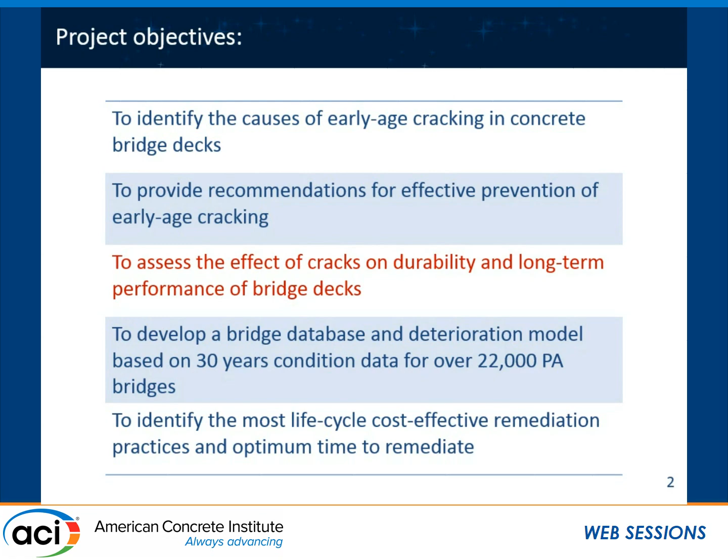Other than that, the work involved developing a bridge database and deterioration model based on 30 years of condition data for a large inventory of Pennsylvania bridges, and finally identifying the most cost-effective remediation practices based on the life cycle cost of the structure, to determine the best way to repair and the best time to repair.

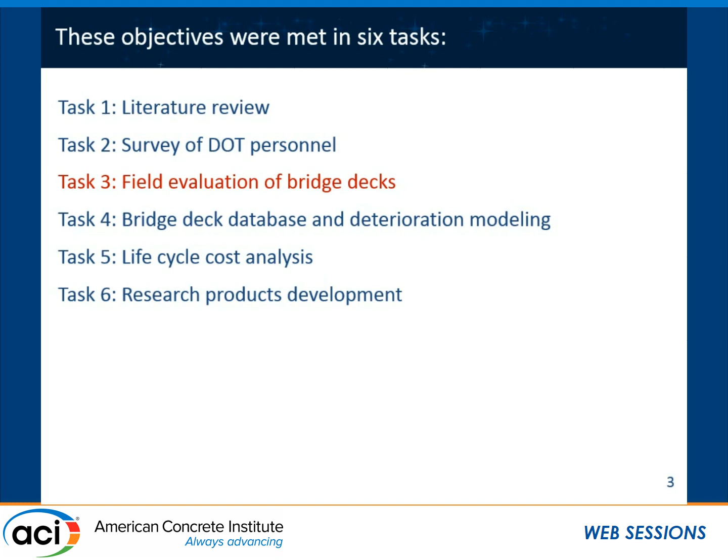These objectives were accomplished in 6 tasks: literature review, survey of DOT personnel, field evaluation of bridge decks (primarily what I'll talk about, item 3), the bridge deck database and deterioration modeling, life cycle cost analysis, and finally development and dissemination of the research products.

The work on early age cracking of concrete is not new research. It's been going on for 30 or so years, and there's a lot of good quality research data that supports some of the causes of early age cracking.

In this slide and the next, I'll summarize in a condensed version what we found in the literature. First, it's been confirmed repeatedly that the primary cause of early age cracking is restrained volume change, as opposed to things like traffic loads and other mechanical loads.

So essentially, as our previous speaker also referred to, we have a concrete deck that is cast in place over a girder, and the concrete naturally wants to shrink or contract after it's been cast. This could be thermal contraction after the concrete temperature peaks around time of setting and then cools down to ambient, and it could also be due to drying shrinkage or autogenous shrinkage.

However, the girder doesn't want to shrink, and as a result we get this restraint effect, tensile stress, and cracking in the concrete deck.

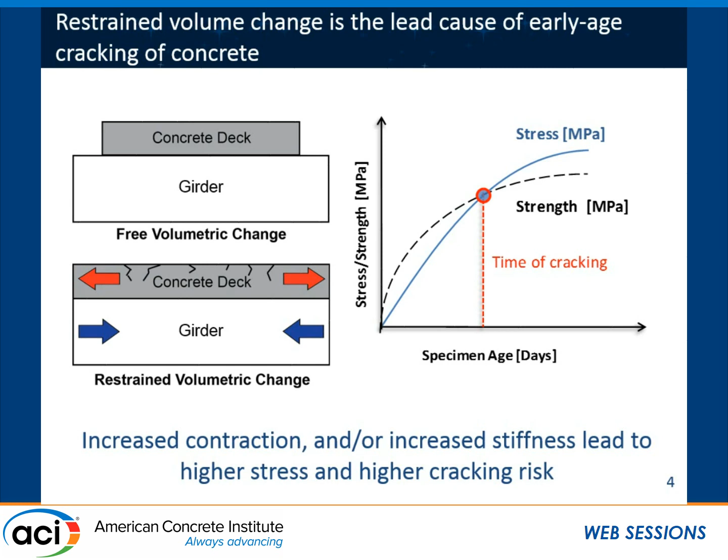Increased contraction could occur, for example, when concrete has a higher paste content, which would shrink more, or a higher cement content and higher heat of hydration, so thermal contraction would be more. Increased contraction as well as increased stiffness, or elastic modulus, or compliance, impact the amount of stress that generates in concrete. So concretes that are stiffer, that are higher strength, somewhat counterintuitively, would be more prone to cracking.

Okay, so some of the key information gained from the literature review. One is that to minimize early age cracking, we have to limit the total amount of cementitious materials or paste content, and 28-day strength, which has a large impact on the stiffness of concrete, as well as slump.

There has been good work, including very good work at the University of Kansas, that shows higher slump concrete could be more prone to things like settlement cracking and so on, or excessive slump in concrete.

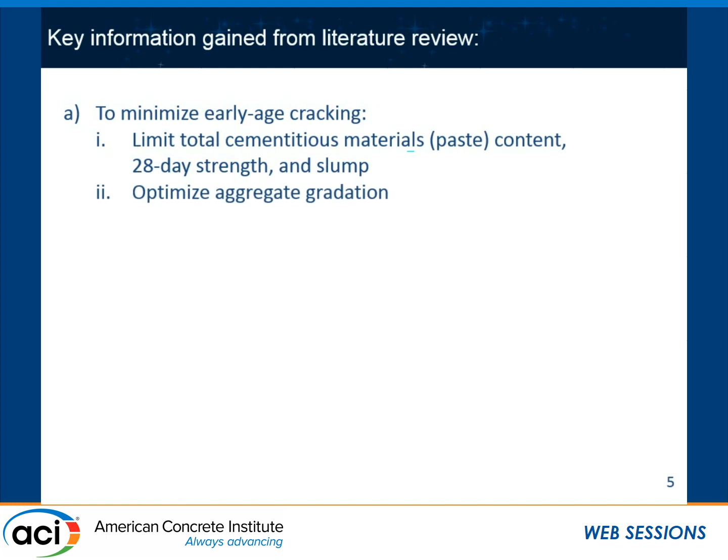Optimizing aggregate gradation would help with reducing the paste content and therefore reducing the cracking. Use of supplementary cementitious materials primarily through reducing the heat of hydration and thermal contraction, and also it has another advantage of increasing the resistivity of concrete.

So once the concrete cracks and once you get the salts at the level of rebar, the resistivity of concrete would help slow down your speed of corrosion or rate of corrosion.

Enforce proper moist curing, so that helps reduce the overall shrinkage and also delays when the shrinkage happens. Limiting rebar size and spacing again helps in controlling the cracks. And there was some mention that concrete girders may be preferred over steel girders, and I'll talk about that more in our data.

Also, the literature suggests that cracking shortens the corrosion initiation. It makes sense - you get cracks, the salts can get direct access to the rebar. But it's interesting that chloride buildup off the crack seemed to be more important than on the crack.

The reason for this has been suggested that right at the crack you can get some corrosion and get some corrosion products which effectively seal the crack, or at least seal the tip of the crack right where it intersects the rebar. It seems like until the other parts of the rebar start active corrosion, you don't get a lot of corrosion happening.

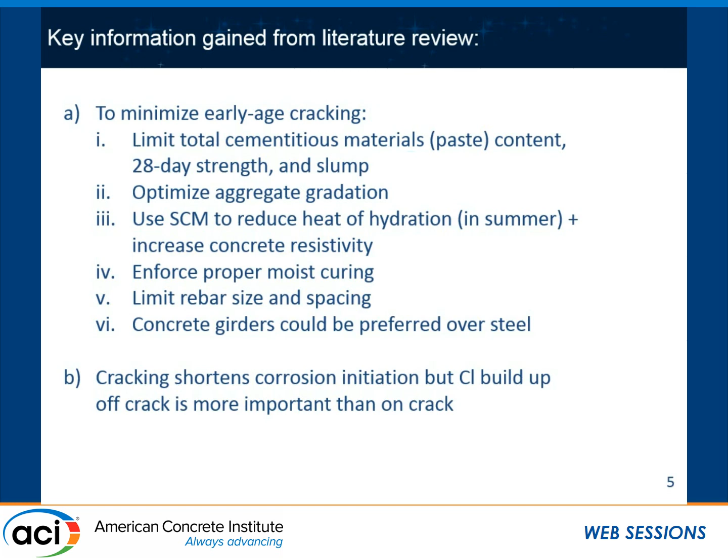To reduce the risk of corrosion, use a minimum of 2 inches of cover and supplementary cementitious material. Any remediation action has to take place before active corrosion starts. So once we are past the corrosion initiation period, repairing is not going to help us much, because the steel underneath is going to keep corroding even if you repair the surface.

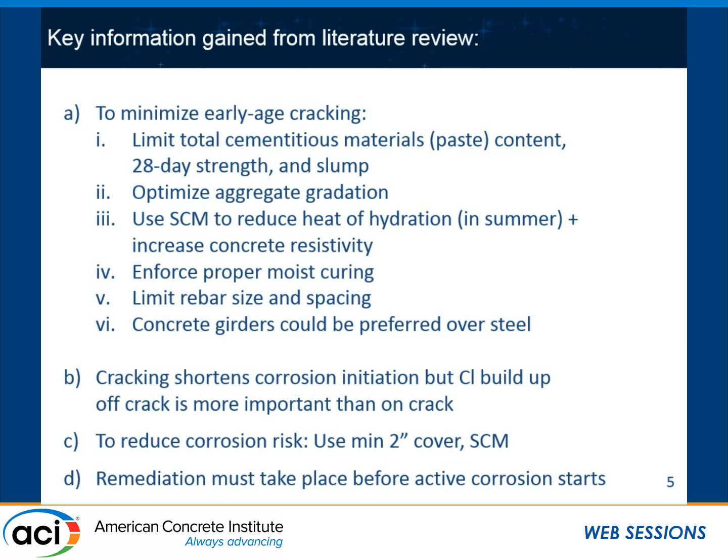So most of these findings are based on lab work, and what we did is essentially look at the field data and the actual bridges that PennDOT owned. We looked at a little over 200 bridges, including 163 new bridges as well as 40 older bridges, and primarily we looked at crack inspections.

We mapped the cracks, measured the length of the crack per unit surface area of the deck, both at the time of construction as well as 1 year after construction.

For the older decks, we did crack inspections. We also did coring and measured the chlorides.

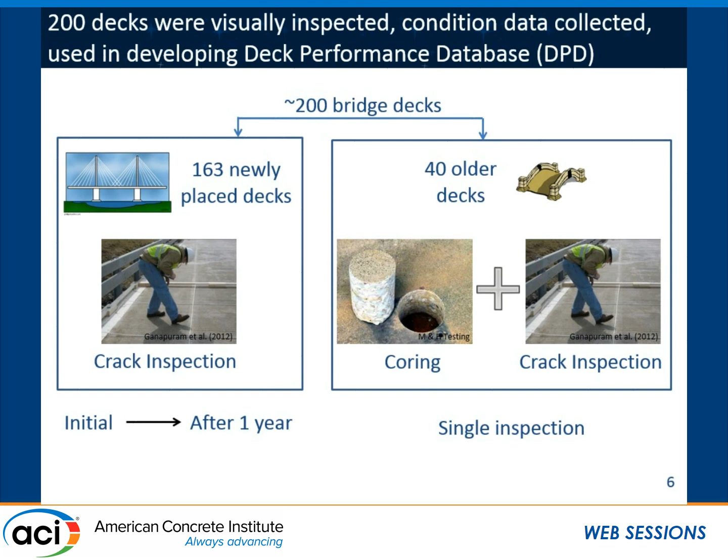So the crack inspection was used to get something called crack density, which is the length of the crack per unit area of the deck. The unit would be, for example, yard per square yard of concrete.

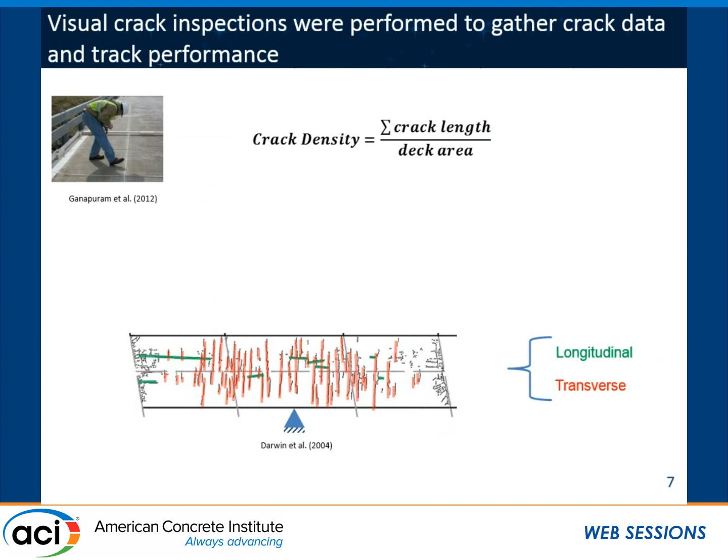We looked at both longitudinal and transverse cracks, and we looked at positive and negative moment areas of the deck.

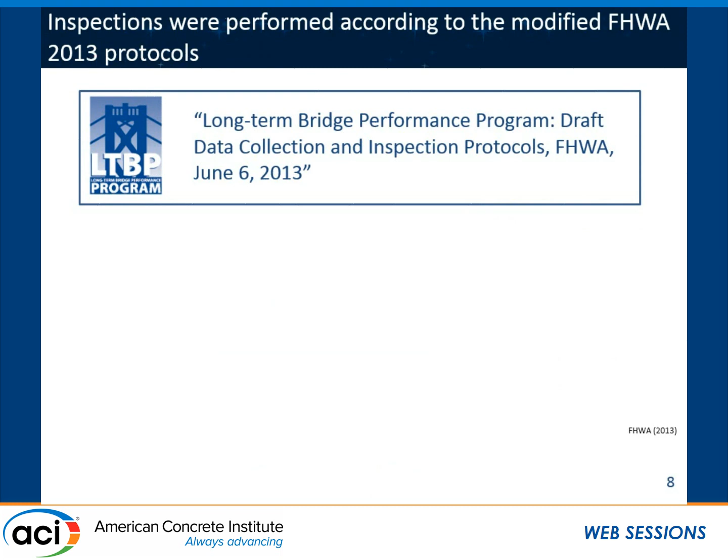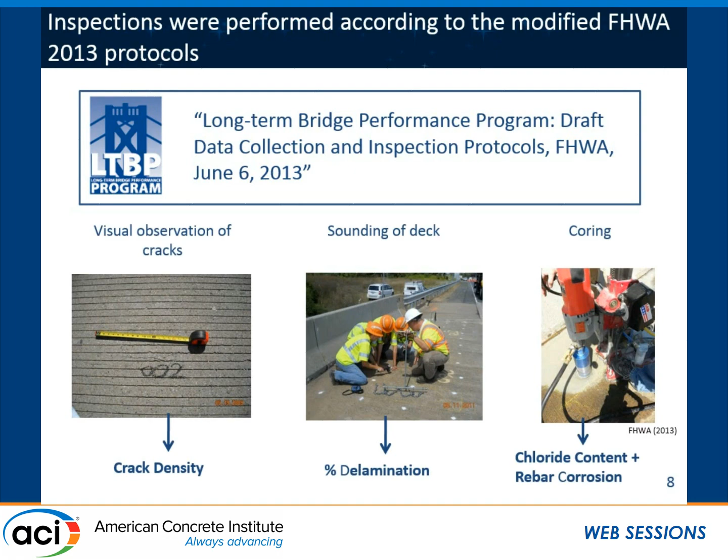This project happened in the span of 2013 to 15. We followed the Federal Highway Administration protocols that were most up to date at the time, which include measuring the crack density, measuring the delamination by sounding the deck, coring, measuring the chloride content, and looking at the rebar status.

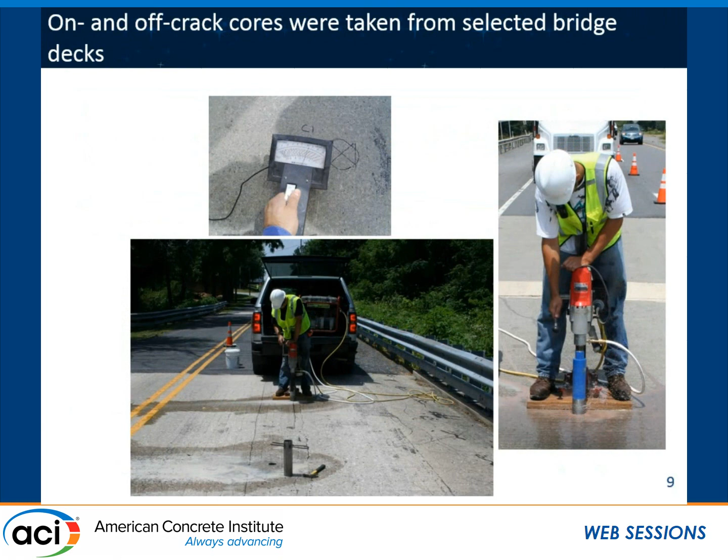The coring happened both on crack and off crack, so we had a rebar locator that we could use to determine where the rebar is. We again took samples from the concrete at the level of rebar, determined the chloride content, and looked at the condition of the rebar.

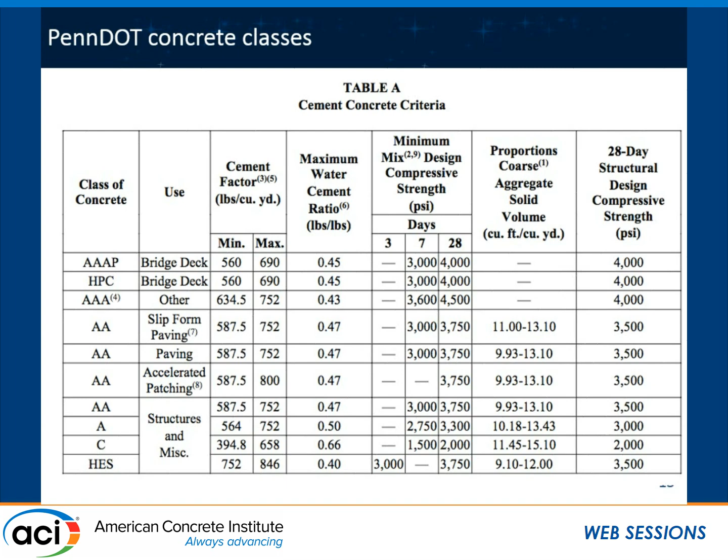We're looking at only these three rows: AAAP, HPC, and AAA. You can see over here that the structural design strength of all three of them is 4,000 psi, so the amount of strength we need from a structural engineering standpoint is the same. However, the PennDOT specification requires AAA to be over-designed by at least 500 psi, so this is designed at 4,500, and the maximum water-to-cement ratio is 0.43 as opposed to the other ones that are 0.45. There's also some information about the minimum and maximum cement content in the PennDOT specification.

If we look at this, this is the same graph that we saw before. This one shows the amount of total cementitious material content, the total Portland cement content, and the total SCM content. The light orange and white add up to the dark orange. We can see the AAA that cracked the most had the highest amount of total cementitious material, and between the other two, the HPC, which cracked the least, had higher SCM replacement in comparison with the AAAP.

So it looks like lowering the strength helps. It looks like capping the maximum cementitious materials is good, and also replacing, within reason, Portland cement with SCM is helping - and that's primarily through reducing the heat of hydration and reducing thermal contraction of concrete.

We also looked at, out of the 163 decks, about a third of them were placed on steel girders and the other ones on concrete girders. It looked like we found a significant difference between the cracking density of the two. We did not explore the cause of this much further - it could be due to the stiffness of steel, or maybe temperature development in concrete and how much of this is sunk into steel, and so on. But it looks like, just based on field data, that pre-stressed concrete girders are doing better.

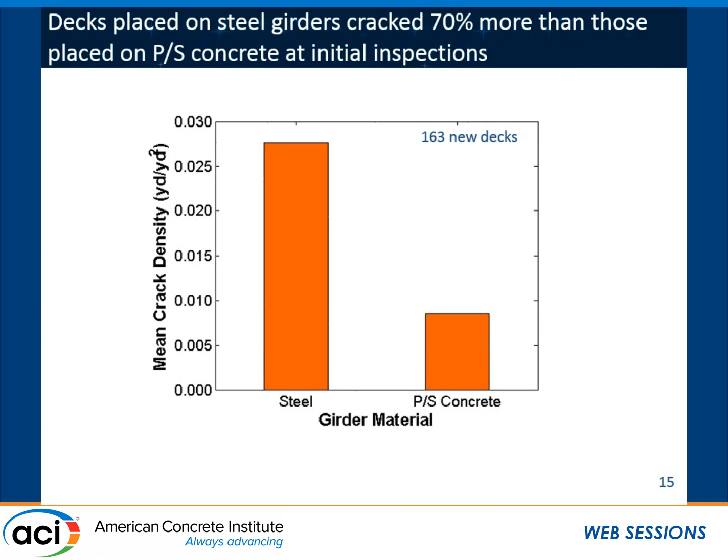We also looked at two methods of construction. One of them is called half-width construction, which means you have a deck and you close down half of it - let's say repairing half of the deck longitudinally and directing traffic on the other half. The full-width construction is that essentially you have a detour and move all the traffic off the deck, and do the repair or reconstruction. It looked like the half-width construction resulted in a lot more cracking.

Okay, now let's move on quickly to the chloride data. This is kind of raw data on the chloride content from the 40 older decks. Obviously, for the new decks, the chloride contents were none or very small. So here we have, as a function of age, the chloride content, and we can see both the on-crack and off-crack data points. We use this data to determine the effective diffusion coefficient of chlorides into the concrete, which is this graph. And we have the data, again, both off and on crack, so we can, for example, see this at the same age, most likely the same bridge - let's say over here, 2 off-crack and 1 on-crack, and so on.

And for these, we also figured out a ratio of the on-crack to off-crack, and we see that for most decks, that ratio is somewhere between 1 to 4. So it looks like the cracking can accelerate the diffusion by up to a factor of 4.

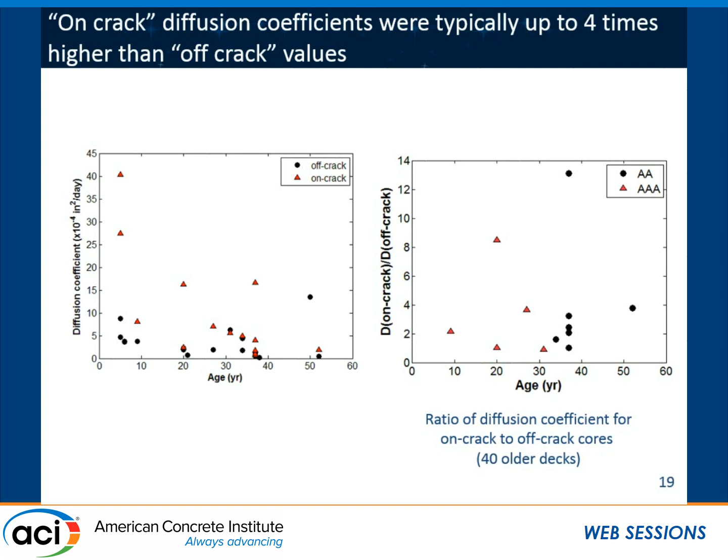We also looked at the black rebar and epoxy-coated, again, in cracked decks. The black rebar - all of the red dots show that the rebar that has started to corrode. The blue shows no corrosion. It looks like at the chloride content of about 0.03% of the concrete weight, the black rebar started to corrode. And for the epoxy-coated rebar, it looked like that corrosion threshold was increased by a factor of about 7.

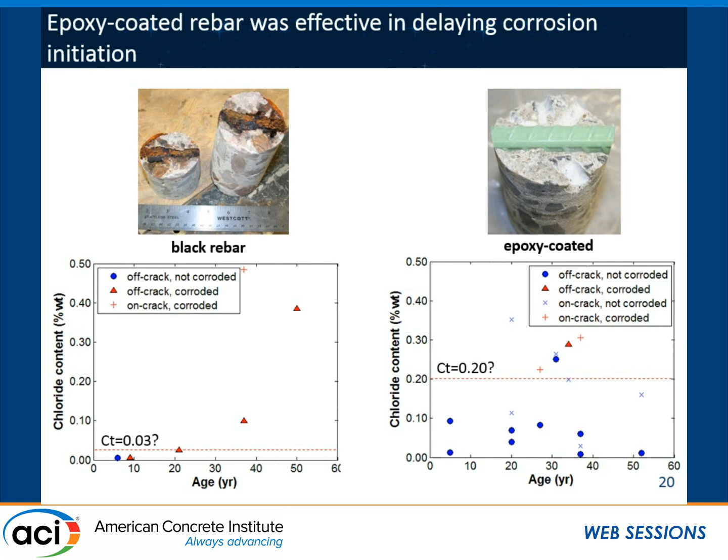So they didn't corrode until about 0.2%, both in the case of cores that were on cracks or cores that were off cracks. So it looks like the epoxy coating is helping, even in the event of cracking.

Okay, let me wrap up with some key observations and conclusions. From the crack density analysis, we learned that a higher compressive strength correlated with a higher crack density. The take-home message is do not over-design excessively. If we need 4,000 PSI, we want to make sure that concrete is not above 5,000 PSI. Over-design is not helping us.

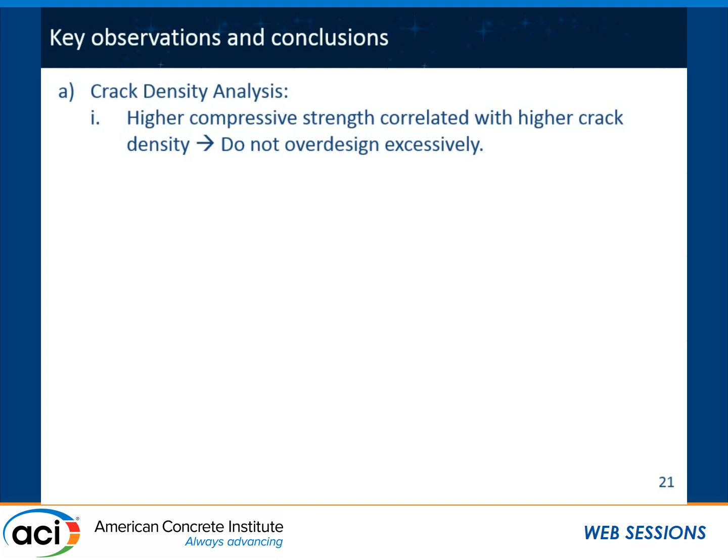The second observation is that lowering cementitious materials content to the extent possible, probably through aggregate optimization and so on, and also increasing the cement replacement with SCMs, when it meets other criteria and to the reasonable extent, would result in less cracking.

Our recommendation based on this work was to limit the maximum cementitious materials content to 620 pounds per cubic yard of concrete and use the SCMs to reduce the heat, increase long-term resistivity, and in case of having reactive aggregates, preventing ASR per AASHTO PP65. I learned today that this is now changed into AASHTO R80, so it's not a provisional standard anymore.

Decks constructed using half-width procedures cracked 4 times more than decks that were constructed using detours. So if possible, full width should be the right approach, or should be the preferred approach. Decks on steel girders appear to crack more, and we'll keep it just as that.

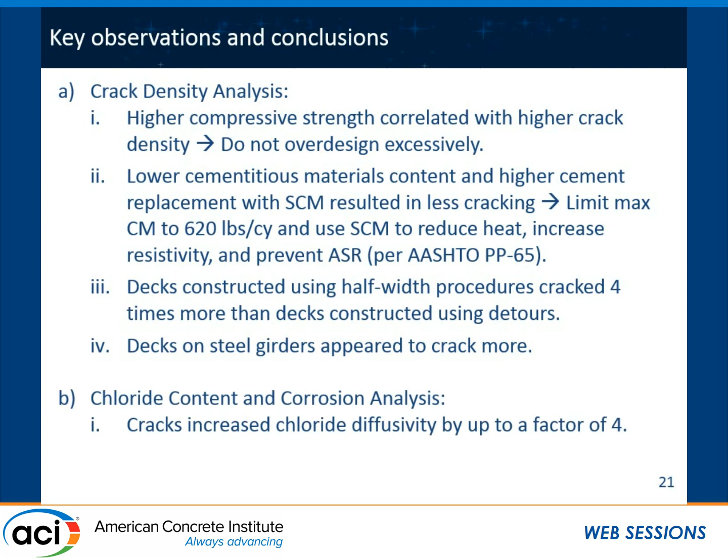And in the chloride content analysis, cracks increase the diffusivity by up to a factor of 4. That makes sense. Also, epoxy coating was effective in delaying corrosion initiation, not permanently of course, but even in the case of cracks. Thank you very much.

Question on your research on 4 times the cracking on half width. It's just hard for me as a contractor to understand with all the rebar. Did you have any reasoning why you think that is, whether half width or full width, why it cracks 4 times as much?

Well, there could be a range of reasons, and I appreciate the question. One is that when you do a half-width construction, you have constant vibration of the deck as you are placing the concrete. Especially in cases where your slump is a little bit on the higher side, you could promote settlement cracking right on the rebar. So that's one reason, there could be others. We didn't necessarily have the opportunity, both in terms of time and funding, to explore the causes of these observations. We were just looking at correlations between the cracks we observed versus different factors like materials and construction methods.

Vibration makes a lot of sense. That's good. Thank you. Thanks.

Did you also measure the crack widths? We did measure, on a limited number of cases, not on all 200 bridges and across the whole bridge. That was one of the things we learned early on in this project: crack mapping on an actual in-service bridge is not trivial, and it's quite costly. You'll have a lot of traffic control issues to deal with, and there are a lot of cracks to map. So we tried to streamline the process and minimize the time a lane was closed to traffic. So, a long answer to say we didn't measure crack widths across every crack.

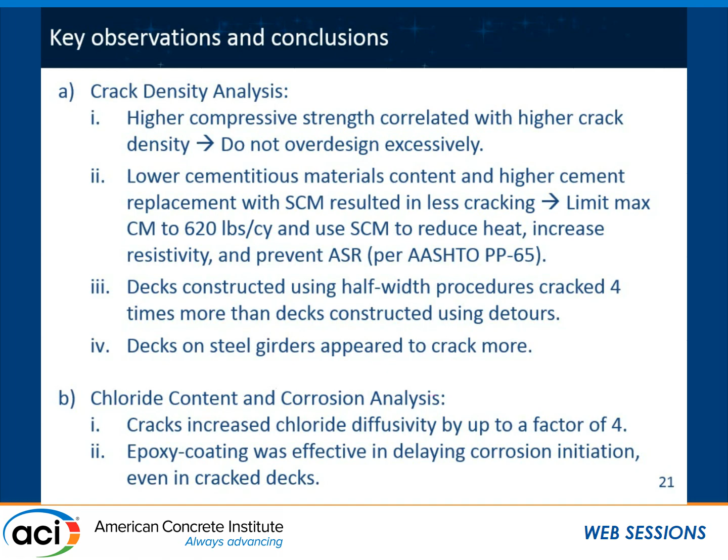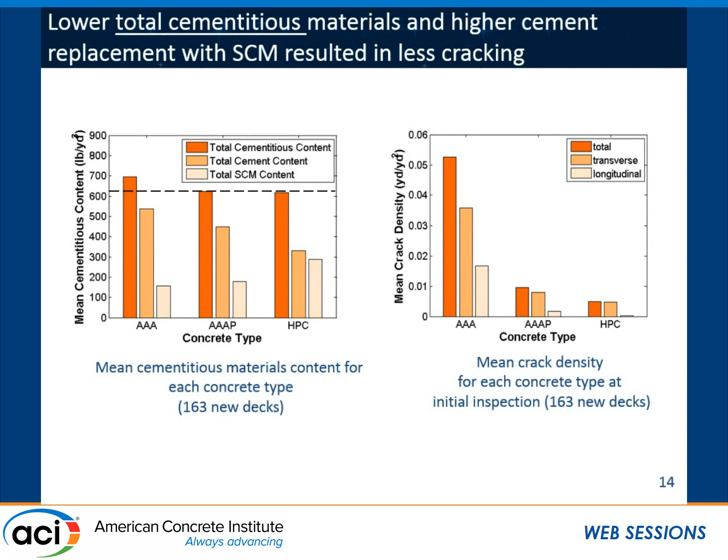Well, there were two sets of bar graphs that I showed you. One is based on initial construction—all of this data was collected within a span of two weeks after placement of concrete. For the older decks, you're absolutely right, there is variability in age. I did not present the crack density as a function of age.

We actually didn't find a strong correlation between crack density and age. We had some very old decks with little cracking, and some young decks with a lot of cracks. Of course at later age you can have other issues like fatigue or structural/mechanical related cracking. So we didn't look at crack density versus age, but we did look at chloride content and whether the incidence of cracking had an impact on the chloride level.

Thank you. Sure. Hey, sorry, just one quick question—I really appreciate the presentation. How did you go about measuring chloride at the crack itself?

Measuring chloride at the crack itself is essentially you take a core at the crack, and your core is still intact because you have a rebar that traverses the crack, and then you can drill and pulverize the concrete right at the level of the rebar. So that's how you get it.

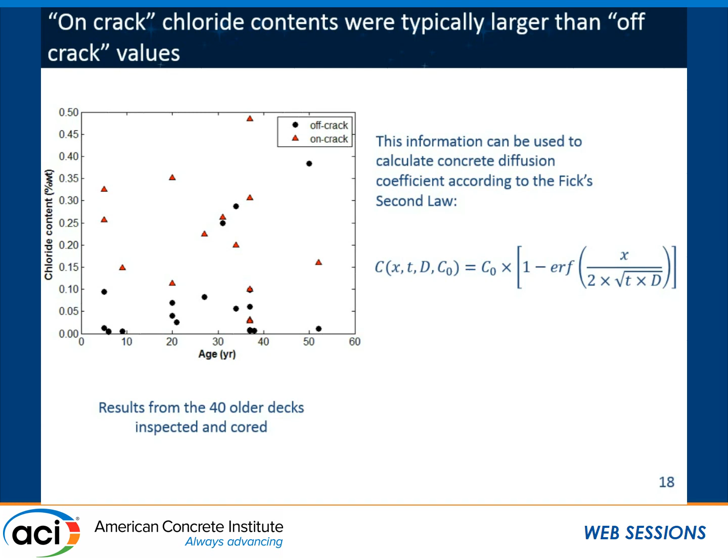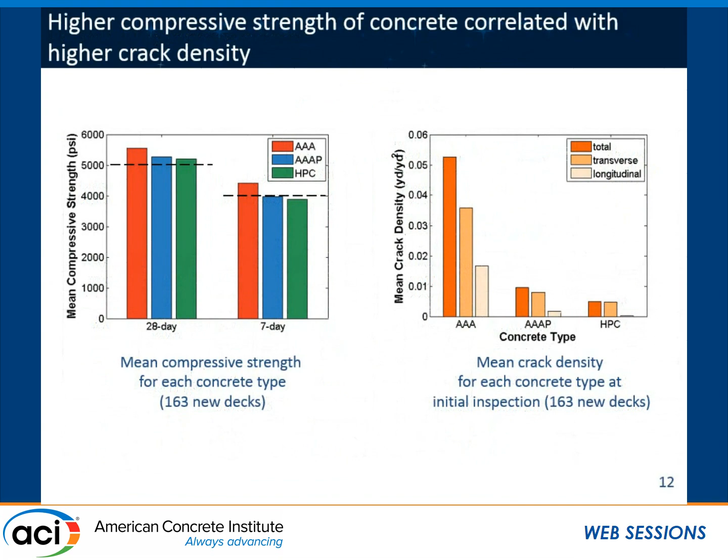Okay, thank you. Sure. I just wanted to make a quick comment about one of the first questions, regarding possible reasons for the increased cracking density in half-bridge construction. Based on my experience, the simple reason may be the increased degree of restraint, specifically if you have a bridge deck, or half the bridge deck, cast and tied to the first half. What I've seen is that a lot of the transverse cracks propagate from that first half and actually taper off towards the edge.

Right, yeah, that's a great comment. So the first half would create a lot of restraint on the second half. Okay, thank you.